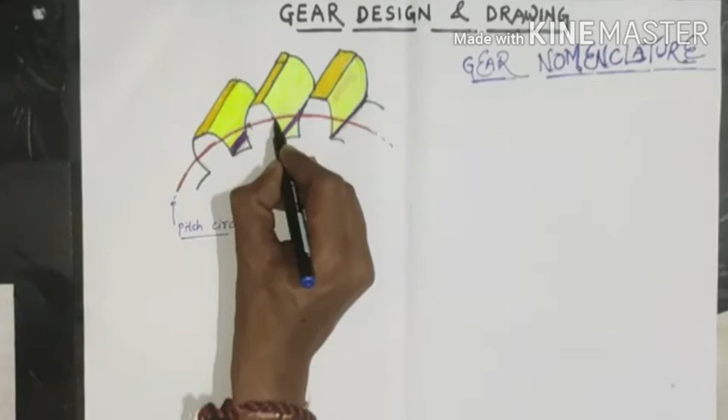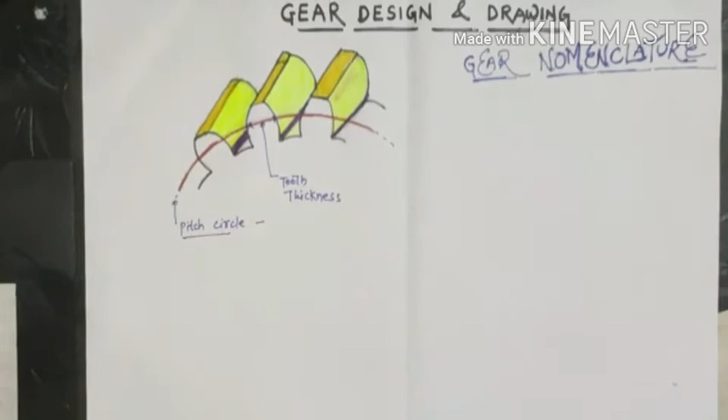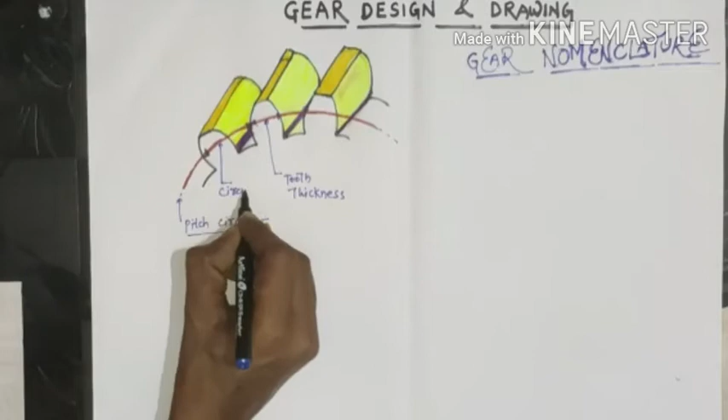Now further moving to the another term. This distance from here to here, okay, what I am putting the dimension like this. So this is total circular pitch. These terms are known as circular pitch. Now further moving to the another word.

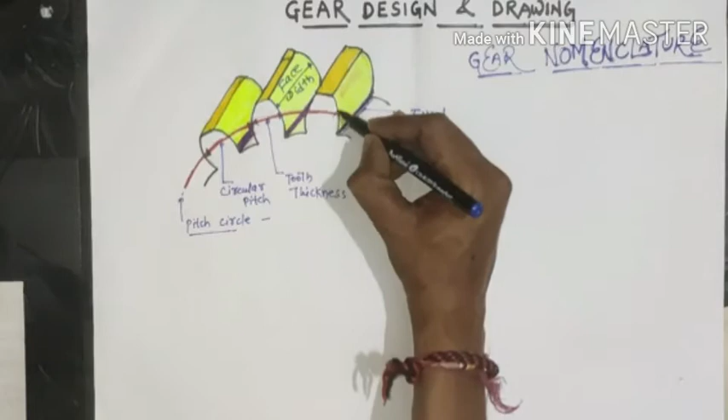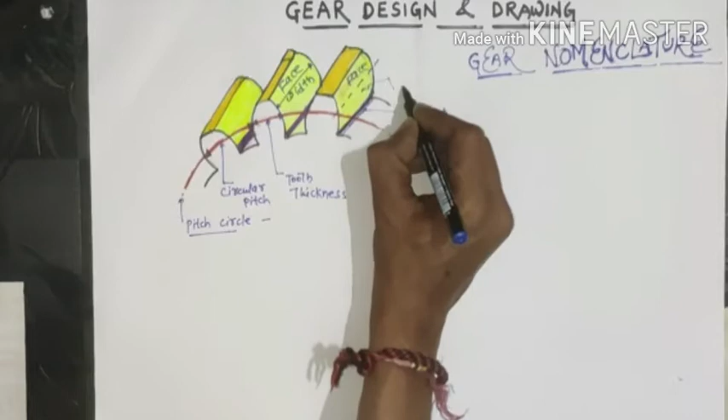So this is your fillet, remember, this is your fillet, and this yellow color lines, or you can say this unique color, shows your face width. Here I am putting face width, and if I divide this width into two portions, one at the top and this is the bottom, so this is your face and this portion is your flank, FLANK.

So now this is the basic terms. So I give a basic definition for each terms, each parameter. So here I started with the terms and the definition and the formula regarding this. So here let's start.

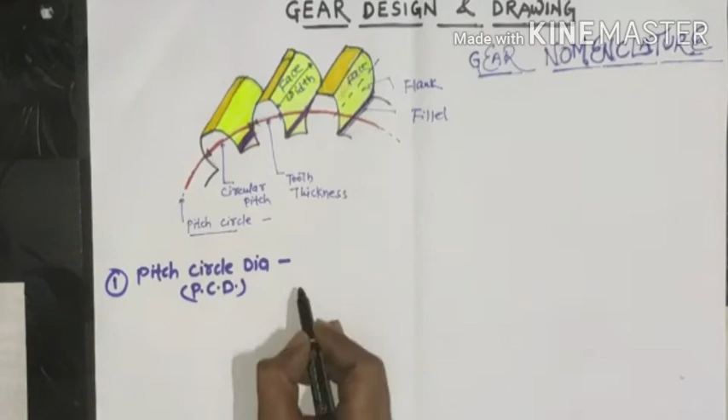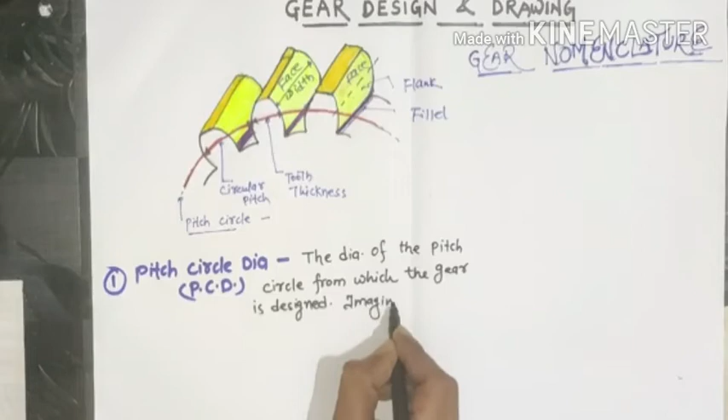So their first gear term is pitch circle diameter, and you can easily denote it with PCD. So I define this.

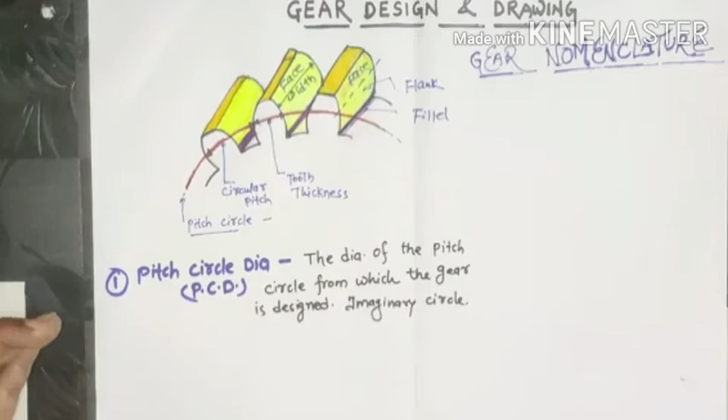Pitch circle diameter is the diameter of the pitch circle from which the gear is designed. This red color line represents your pitch circle diameter, and it is an imaginary line, or you can say imaginary circle. How to draw pitch circle, how important is pitch circle, I tell much more detail with a diagram or with a spur gear design. During spur gear design, when we draw a gear for a number of teeth according to the question, then I give a full detail about the pitch circle, the circular pitch, and all about. So this is your basics, and pitch circle diameter is equal to module into number of teeth. So this is first formula.

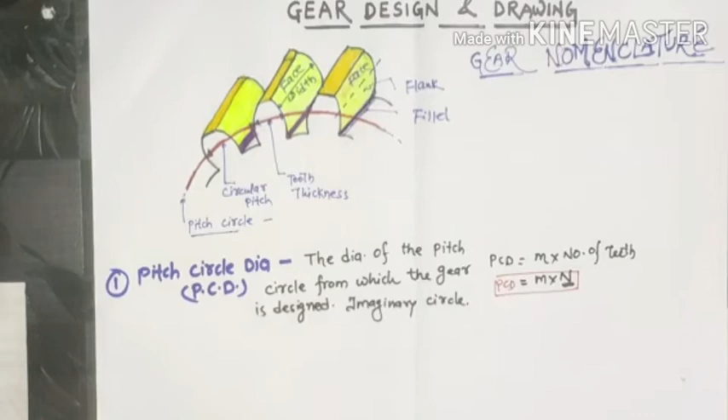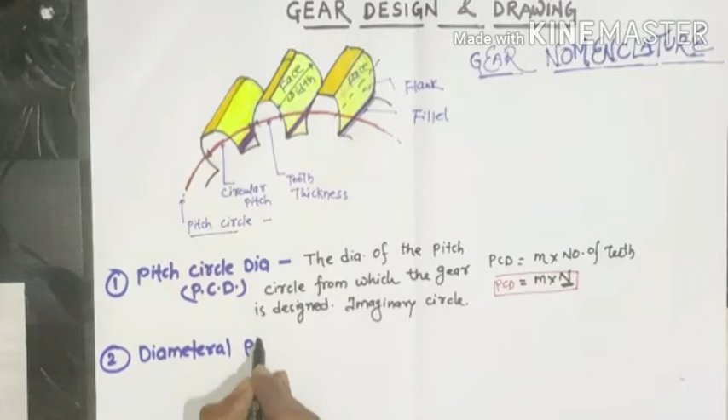Now we are moving further to the next term, and this is diametral pitch. So second one is your diametral pitch, DP. So I denote it with DP. And what is the definition of diametral pitch? So here I define it, and it is very simple: a ratio of number of teeth to the pitch circle diameter. Diametral pitch DP is equal to the ratio of number of teeth upon pitch circle diameter. So here in the numeric form it is all about N upon PCD. So this is the definition of diametral pitch.

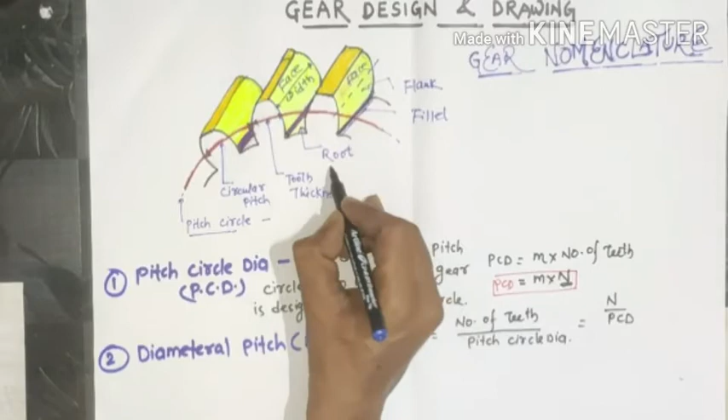And now move towards another. So a few important terms I forgot to explain here, and here I show you. This is your root. This is your root. So a few important terms here, this is your root.

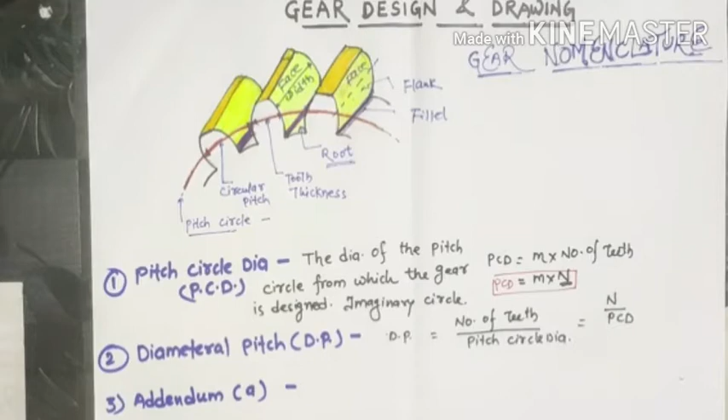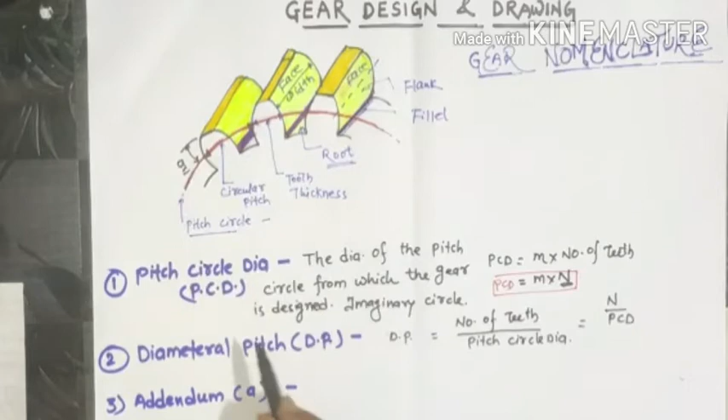Now the next term is addendum. Addendum, and here I denote it with the letter A. Addendum is the distance between the pitch circle and the top of the tooth profile, or you can say the top of this addendum circle diameter. So this shows your addendum. And this top line like this is your addendum circle diameter. Addendum circle diameter. And same, this shows your root circle.

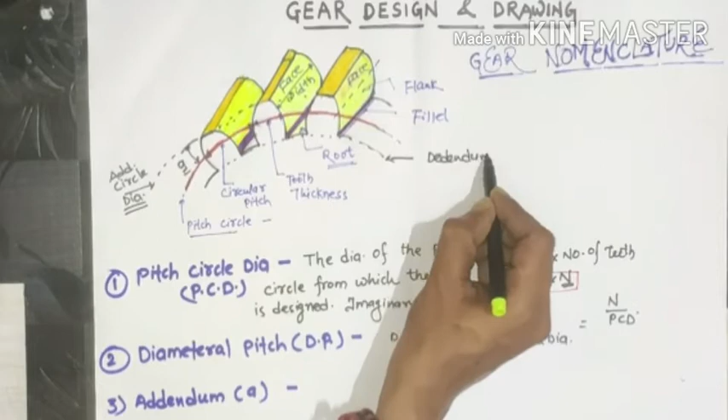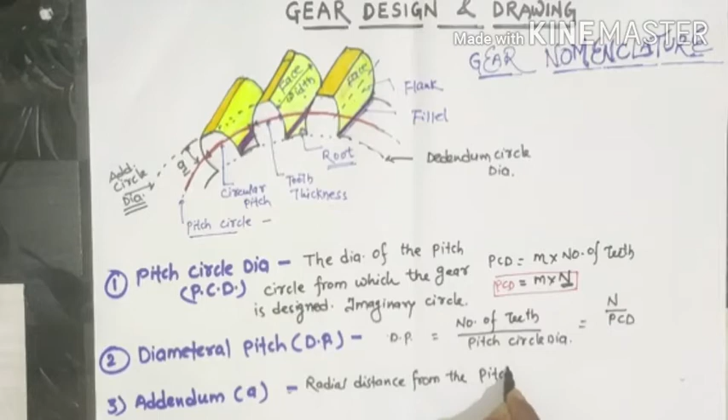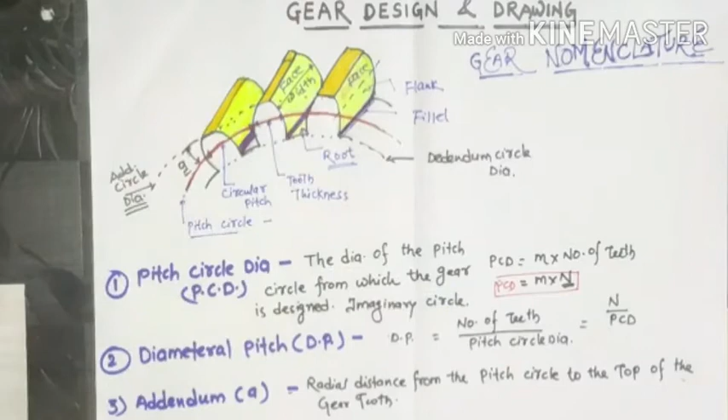This is your root, so root circle, and here another name is dedendum circle diameter. So addendum is the radial distance from the pitch circle to the top of the gear tooth. So this is the top of the gear tooth, and this is your pitch circle. So radial distance between them is known as addendum, and the circle is drawn from any fixed center point, and it is known as addendum circle diameter. Similarly, next term is dedendum.

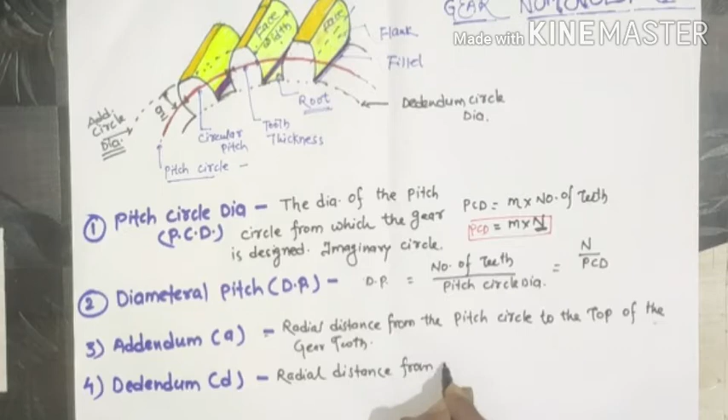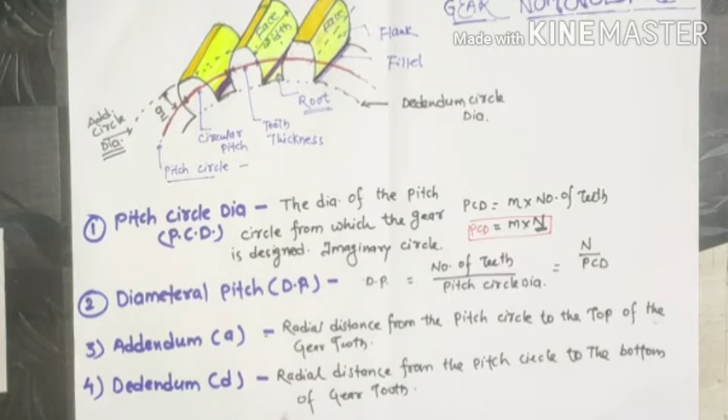And it is denoted by D. So you can easily guess the definition of dedendum. It is defined as the radial distance from the pitch circle to the bottom of the tooth, or gear tooth. This radial distance represents your dedendum.

Now, what is the dedendum circle diameter? It is also known as the root circle diameter, and it is equal to pitch circle diameter minus 2 into dedendum. Remember this.

And what is the addendum circle diameter? It is equal to pitch circle diameter plus 2 into addendum. This is the formula for addendum circle diameter, also called the outside circle diameter or tip circle diameter.

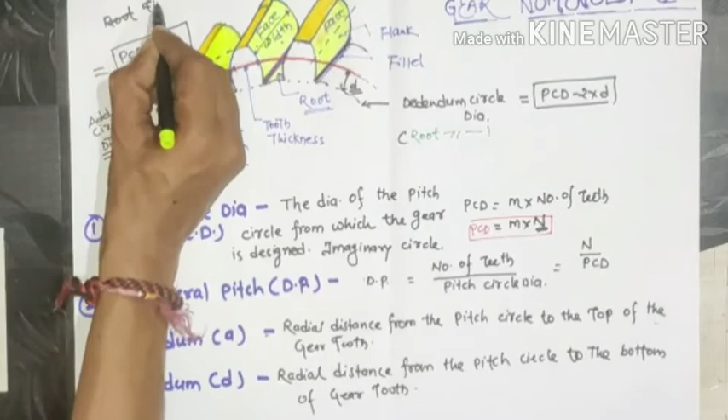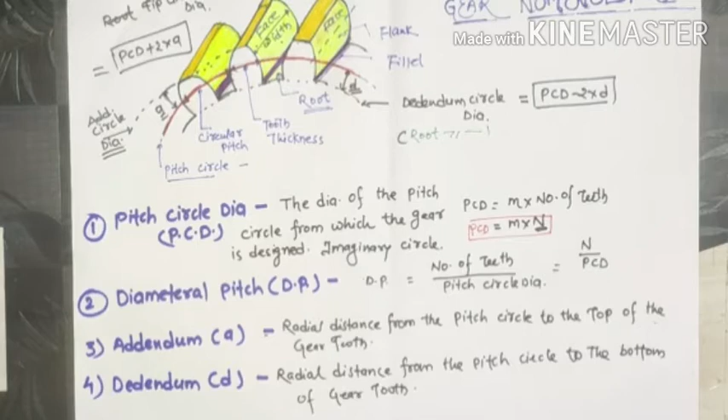Next term is circular pitch, denoted CP. What is the definition? From the given diagram you can see it is the distance, the circumferential pitch distance along the circumference of the gear from one tooth to another tooth.

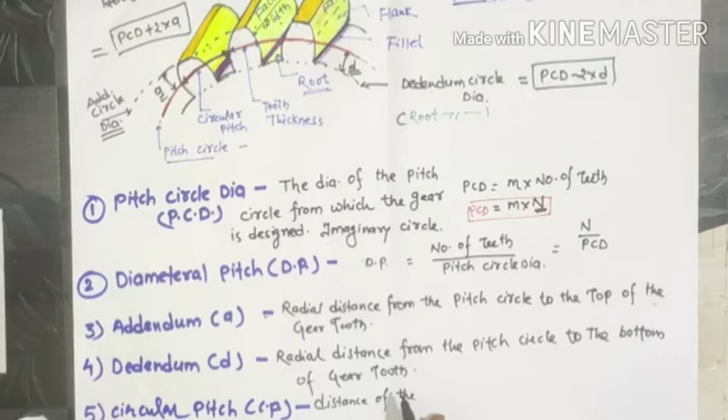So the definition is the distance measured along the circumference of the pitch diameter, from the point of one tooth to the next tooth. This is the definition of circular pitch, and it is equal to pi into m.

So circular pitch CP is equal to pi into m, where m is equal to module, and module is also equal to addendum. Remember this. Now what about the tooth thickness?

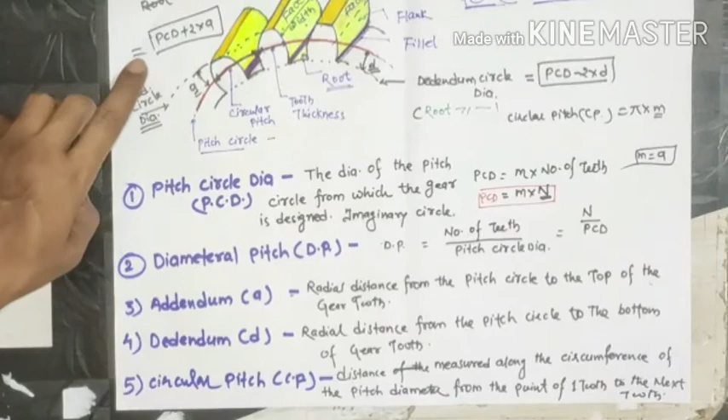It is also measured along the circumference of the gear tooth profile, or along the circumference of the pitch circle. This distance is your tooth thickness, and it is denoted by T. So all terms are clear here.

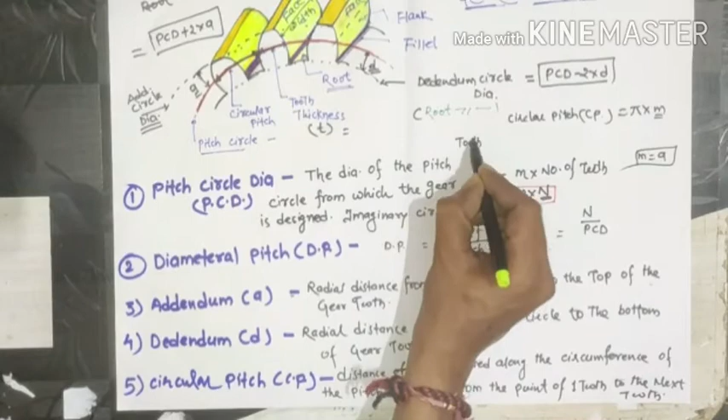Now we are moving on. Tooth thickness is equal to CP by 2, meaning this is equal to circular pitch divided by 2. So if we halve the circular pitch, we get tooth thickness. All terminologies are covered here.

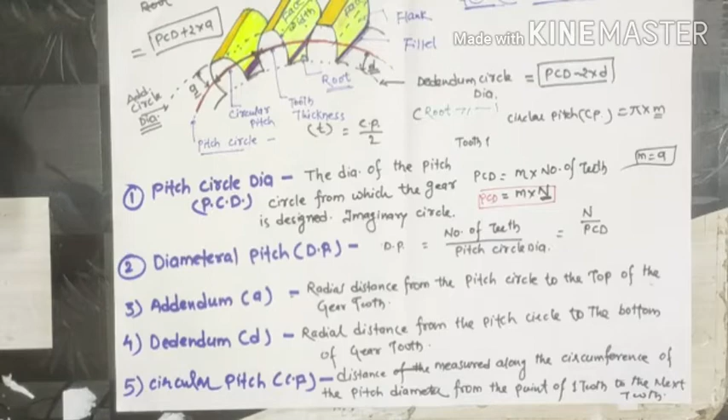Our next approach is to design a gear for a certain number of teeth. We have a problem about gear design and drawing. I will quickly explain in much more detail about the gear design, so all the nomenclature of gears can be easily understood, putting the formula for each parameter to design the gear.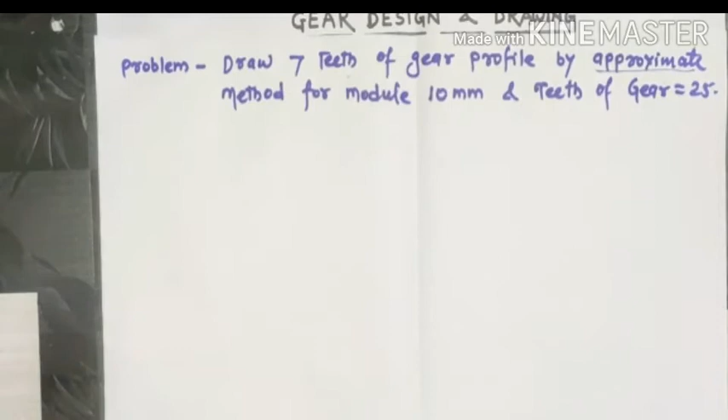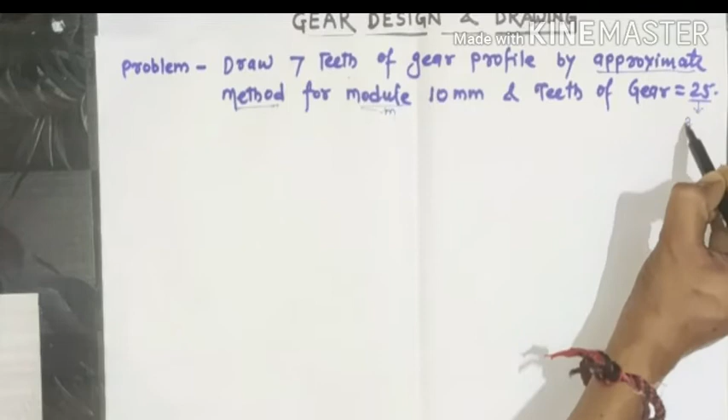So firstly I construct the gear using the approximate method, having a module m equal to 10 mm and teeth equal to 25. It is different if we have teeth less than 30 versus greater than 30 - the approximate method changes slightly for teeth greater than 30.

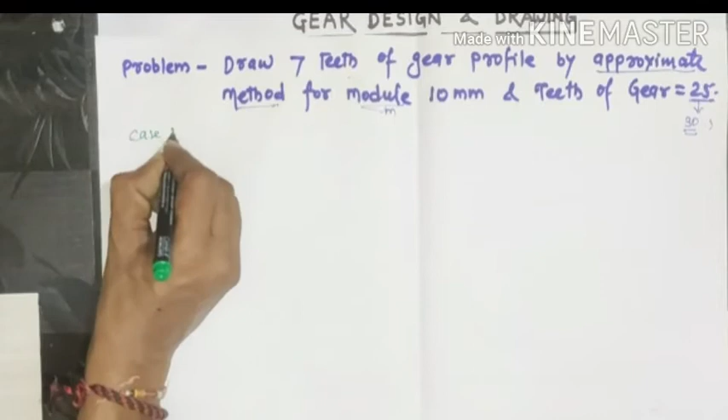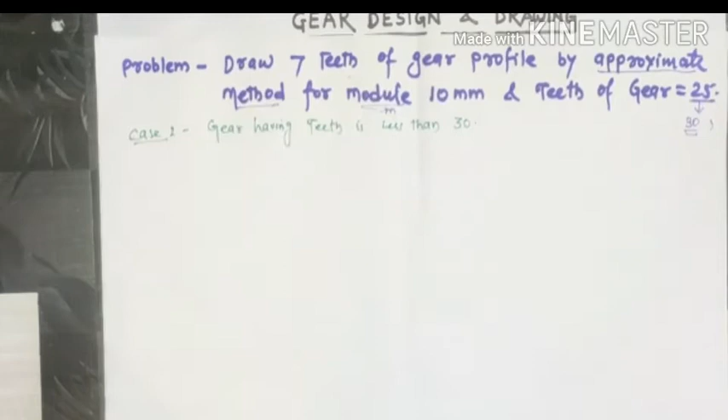So firstly we have teeth less than 30. This is case 1: gear having teeth less than 30. Let's start the calculation. Point wise, module m is equal to 10, number of teeth n is equal to 25, and the remaining parameters are calculated as follows.

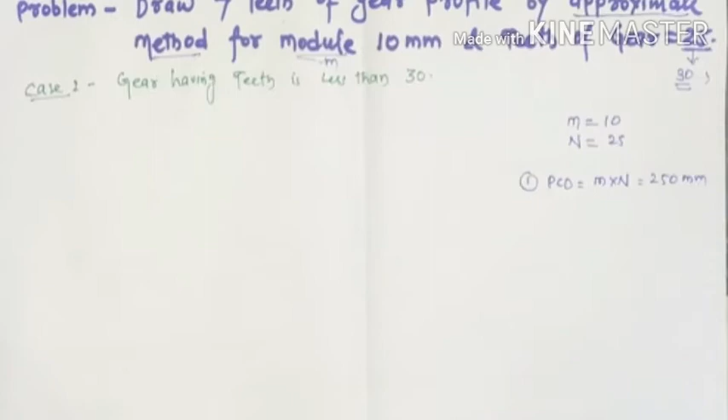Number 1, PCD is equal to the formula m into n, so this is equal to 250 mm. Now second, addendum. Addendum is equal to module - remember, addendum equals module - so this is also 10 mm. What is the addendum?

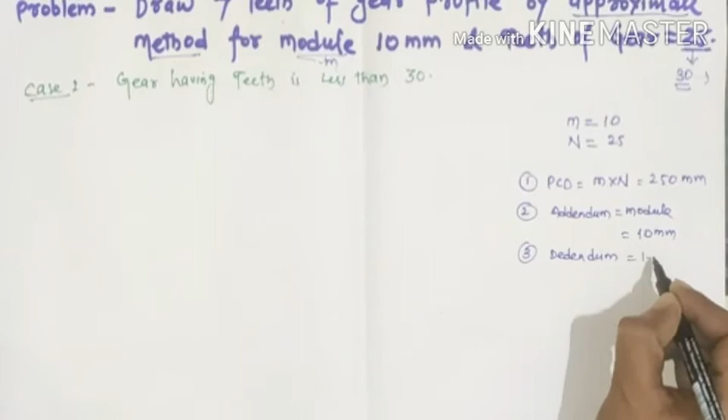So dedendum is equal to 1.25 into m. So here 1.25 into 10. Okay, so it is of 12.5 mm.

Now your fourth is addendum circle diameter, and it is equal to pitch circle diameter plus 2 into addendum. So pitch circle diameter is equal to 250 plus 2 into A. What is A? A is 10 mm. So it is about 270 mm.

And your dedendum circle diameter is equal to PCD, pitch circle diameter minus 2 into dedendum. So 250 minus 2 into 12.5. So it is about 225 mm. Okay, this is 25. And your circular pitch, number 6.

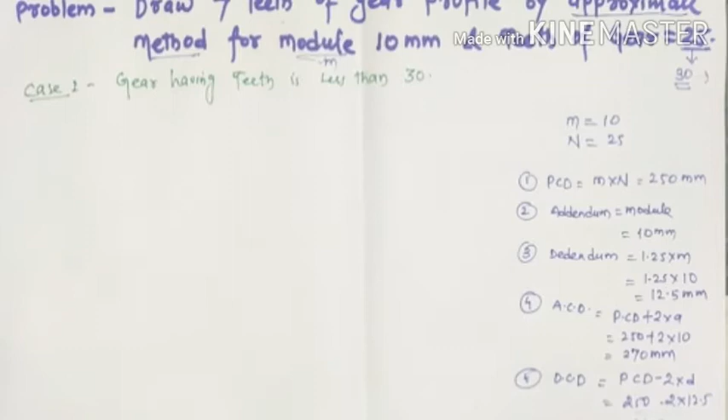Circular pitch is equal to pi into m. Here I already tell about this. So pi into m, so 3.14 into 10. So this is all about 31.4.

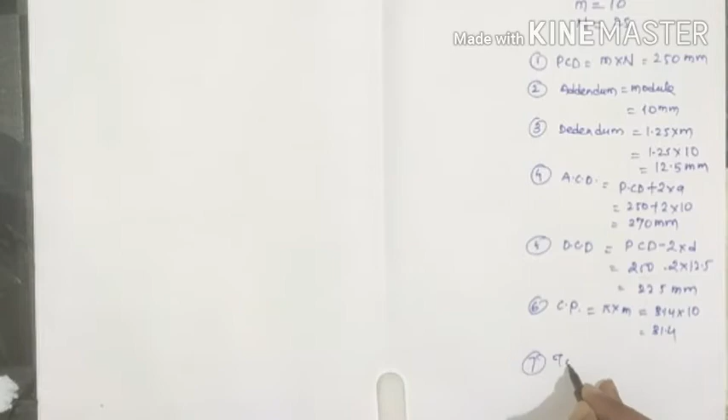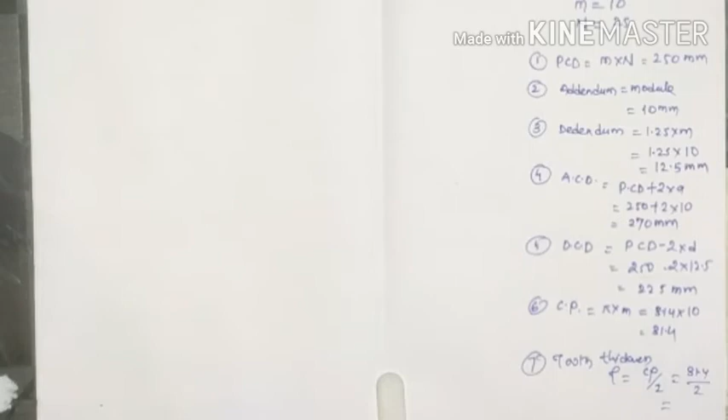And last, your tooth thickness, small t, is equal to Cp by 2. Remember this formula, Cp by 2. So 31.4 divided by 2. So this is 15.7 mm.

Okay, so this is the calculation of all nomenclature. So here we are using MD right now. So first we set the MD parallel to our sheet or our drawing board.

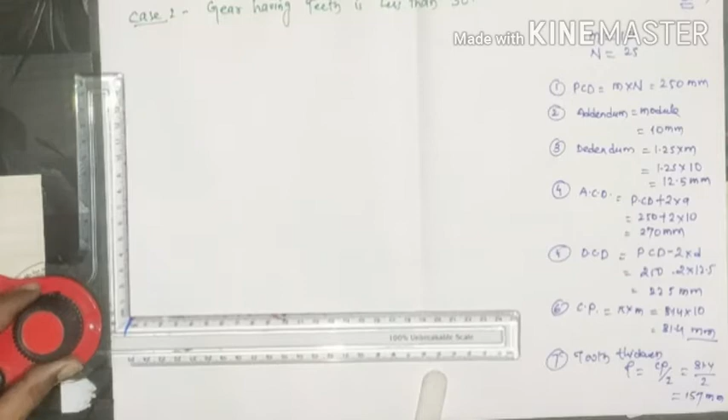Now let's start with the line. So here this starting line, and this is your center. Now this is your all diameter.

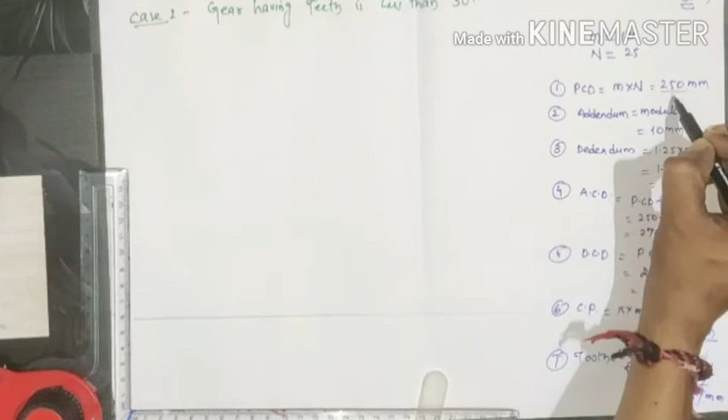So now we need to divide it, or you can say half of the diameter, because we need a radius for certain. So if we divide pitch circle diameter by 2, then we have 125 mm of radius. So starting with this, now let's start. So select 125, that means 12.5, like this.

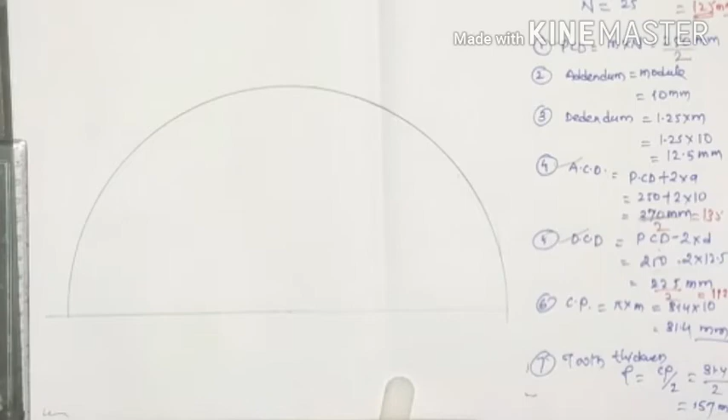Okay, now we draw all the circles like pitch circle diameter, addendum circle and dedendum circle. So we need half of the remaining two. So here this is 135 and this is 112.5. Okay, so 135, that means 13.5, like this.

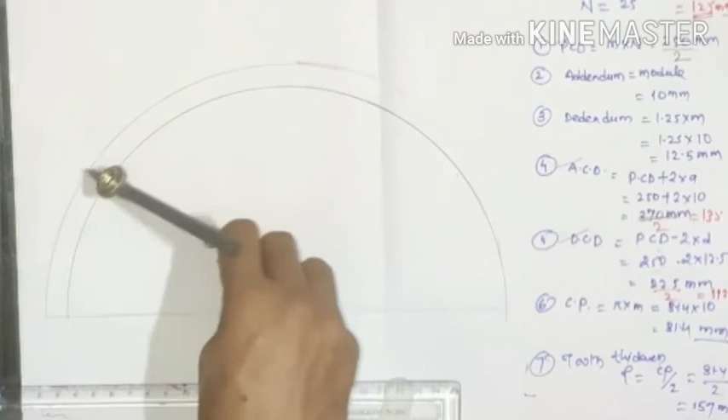And same center, radius equal to half of the addendum circle diameter, like this. So you are using a 2H pencil for this construction, like this.

Okay, now we follow the same step for the dedendum circle diameter, and it is about 112.5, that means 11.2, like this.

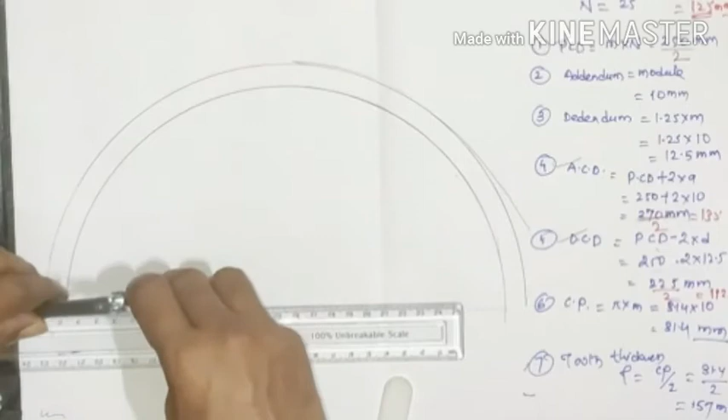So this is your all three circles. Okay, now you can select any point straight to this or imaginary to this, like this. So this is your O point, remember, and select any point on the pitch circle, that means this place. So here we can say this is your P, pitch point.

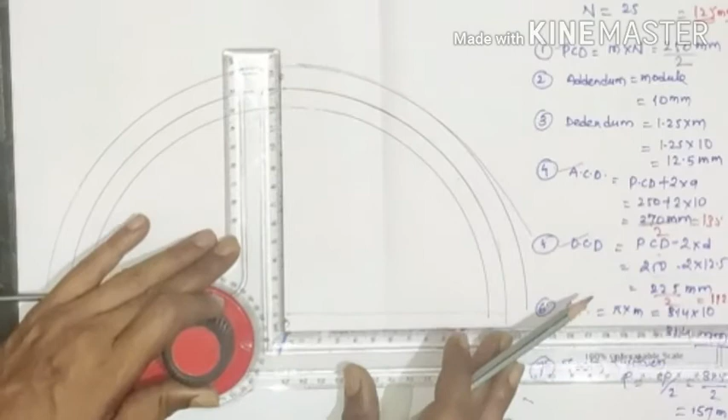Now let's start. So this is what is the length of the pitch circle diameter? This is of 125, 12.5, like this.

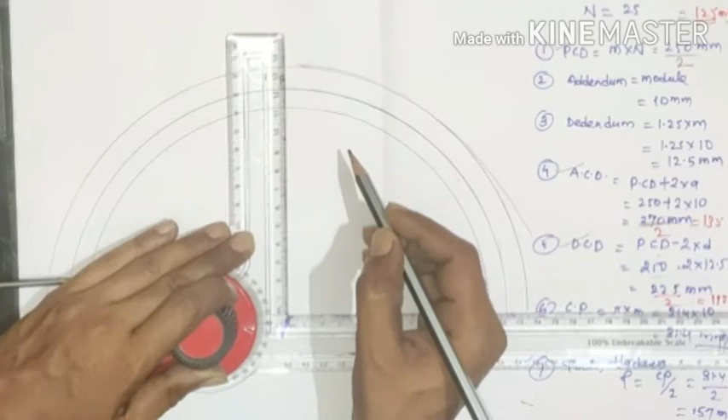So, and we need to half this length. So 125, and half of 125 is 62.5, like this. Now this is your center and radius equal to this. Draw an imaginary circle and draw a circle like this.

Okay, this is your point, this is the middle of this OP, like this. Okay, very simple, understand carefully.

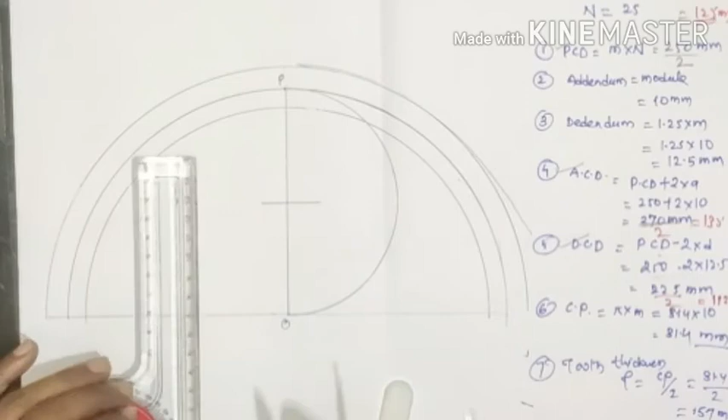So after it we again need to half this. So what is the half of this? So again this is your 62.5, so the half is 31 point something, so like this, and select the middle point from both the ends, like this.

Okay, and P, remember, P as a center, okay, and radius equal to half of this line, draw like this, okay.

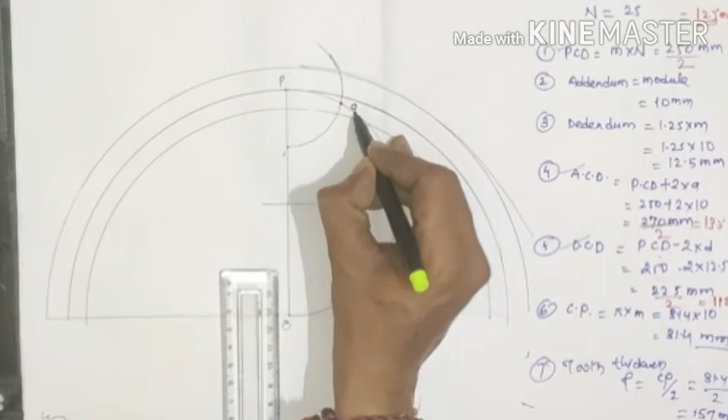Remember, I assumed this as Q, or capital can also write. Now remember, O as a center, and radius equal to OQ, like this, draw and again a circle, and this is known as your base circle, like this, okay. Now we start constructing the tooth on this profile.

So now our next step is marking points 1, 2, 3, 4, 5 etc. on the pitch circle. So this is your pitch circle. So I start marking points 1, 2, 3, and what is the distance? So distance is equal to tooth thickness, that is 15.7, that means 1.5 approximate, okay.

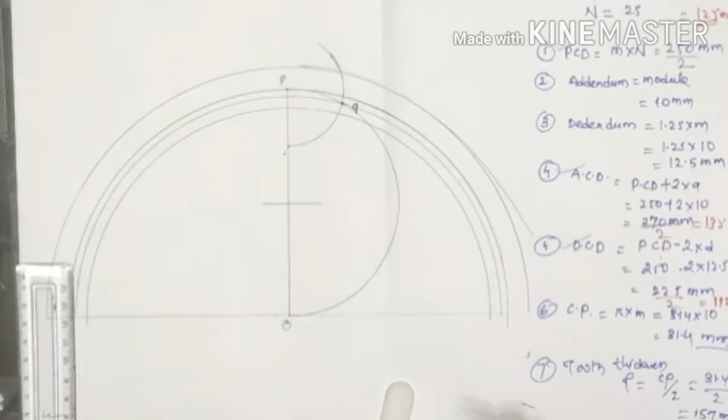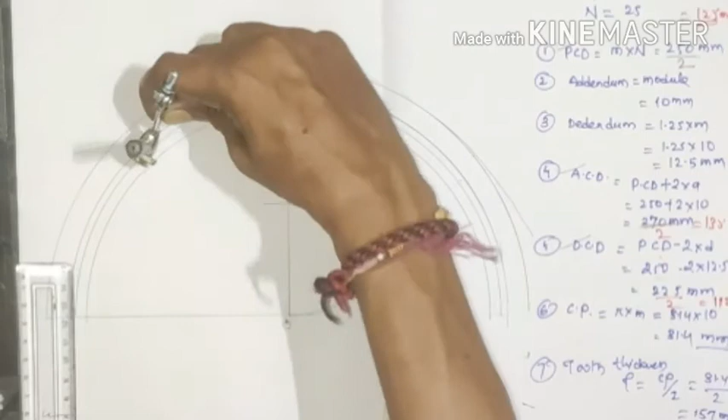And from anywhere on this pitch circle, so just select from P and start marking like this on the pitch circle. So on the pitch circle we have to draw many points like this, okay. You can see, I am making arcs here to show you.

So here start marking, so I represent it with 1. Okay, now this is your 2, this is your 3, this is your 4 again, okay.

This is, sorry, this distance is much larger than this, so again take a suitable dimension like this, this.

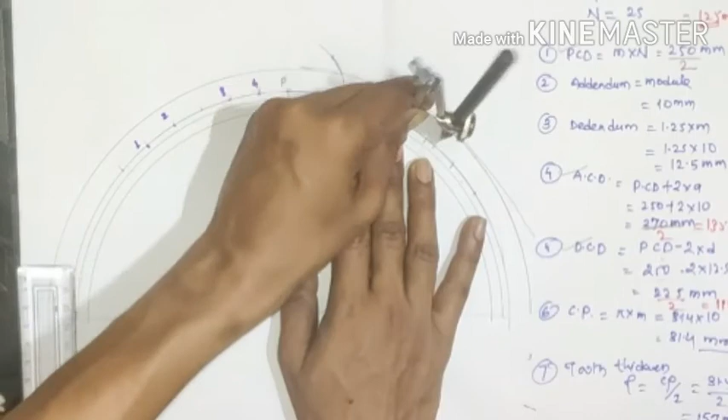Okay. So what is the point here? So this is your 4, this is your 5th, okay, this is your 6, then this is your 7, this is your 8. So like this you all start marking the points.